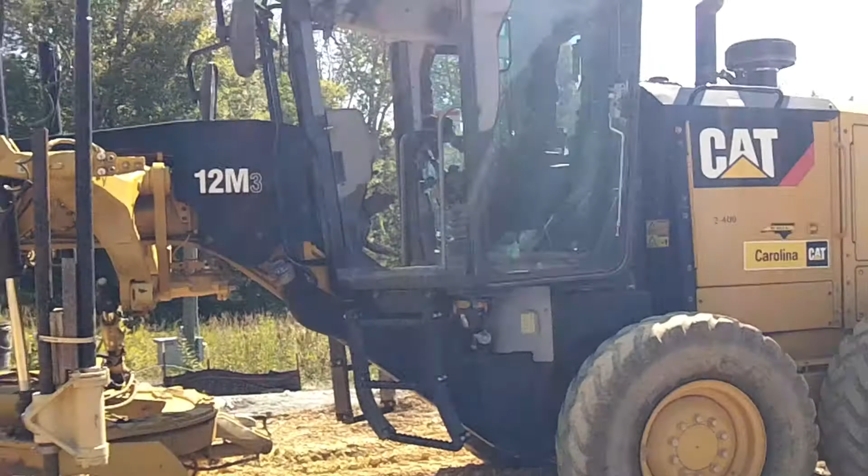Alright, so basically with the road grader, it's pretty simple. It's just like an MC square system on a dozer, which we're going to get that dozer up and running as well. But anyway, you want to get the pole pretty much straight up and down, best you can.

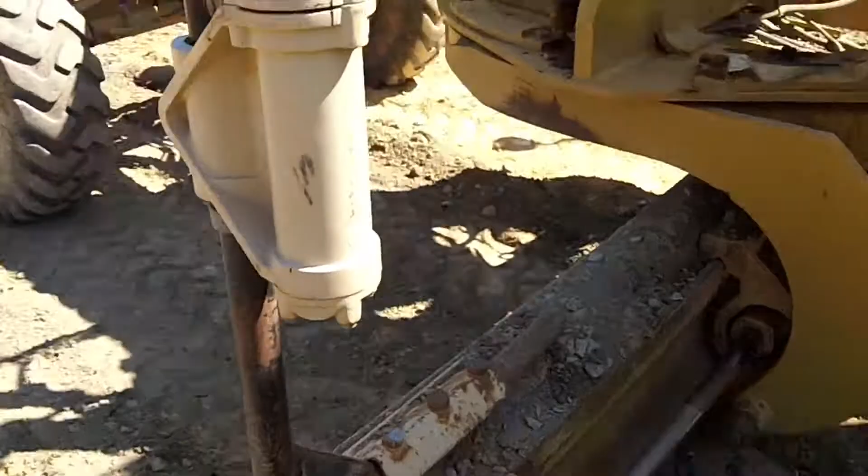And this is where you're going to be telling the sensor where zero is for that pole, basically. So if you go this way, you've got the corner of the blade, whether you're using the right or the left. How far over or inside is this sensor coming down? And where does that sensor land when it comes straight down? So how far over is the sensor? How far back, how far behind is the sensor?

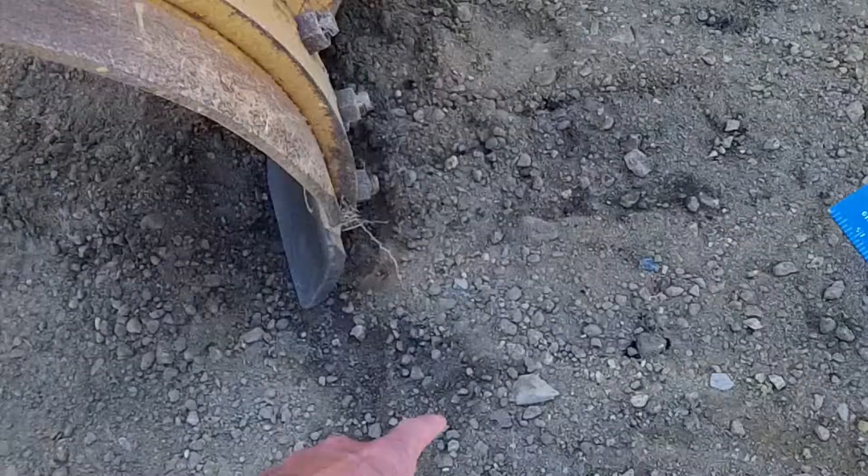Once you find that magic spot of where that sensor is, you need those two measurements: the width of the blade and the height of the antenna. How high is it down to the corner of the blade? That's it, those measurements right there. And then you calibrate the system and you run with it.

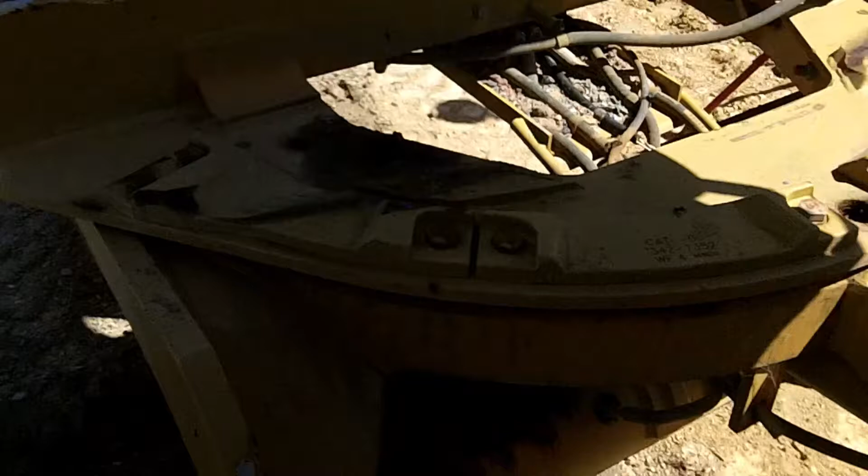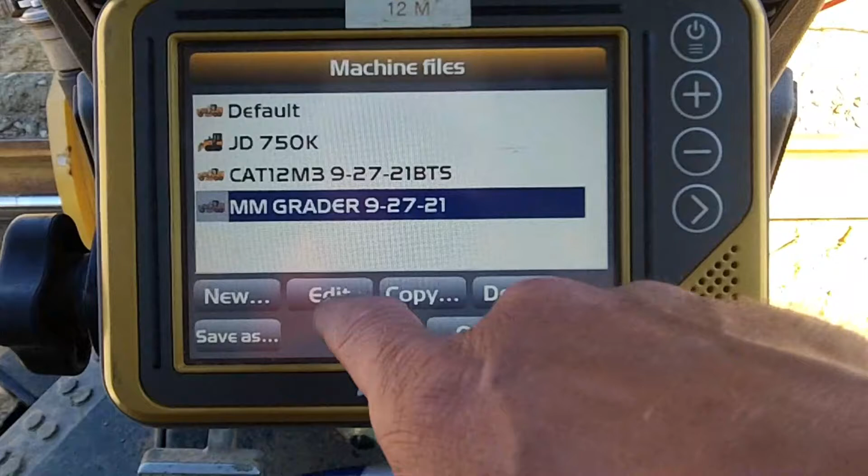So it seems like he's got a slope sensor calibration issue. It just needs to be calibrated. So, because right now, this essentially is zero for the antenna. Once that antenna is straight up and down, in pretty much every position in reference to the blade, that sensor should know that that's zero. And it's not knowing that right now. So we're gonna have to just edit this one.

What did I say this was? 12M3.

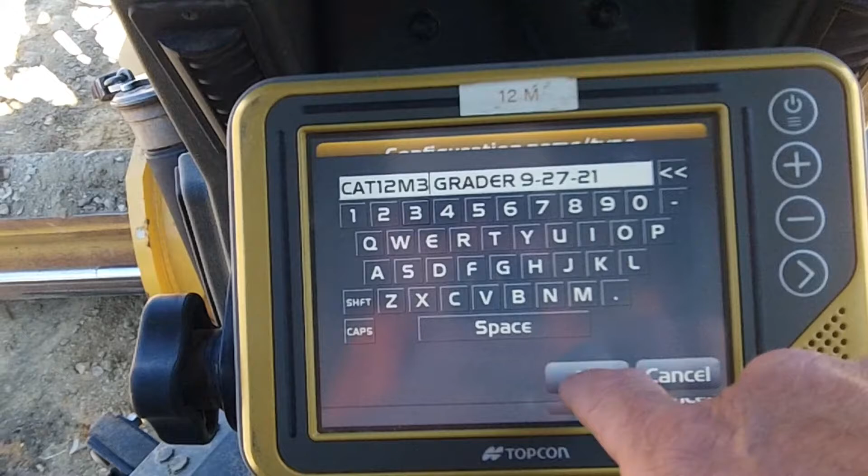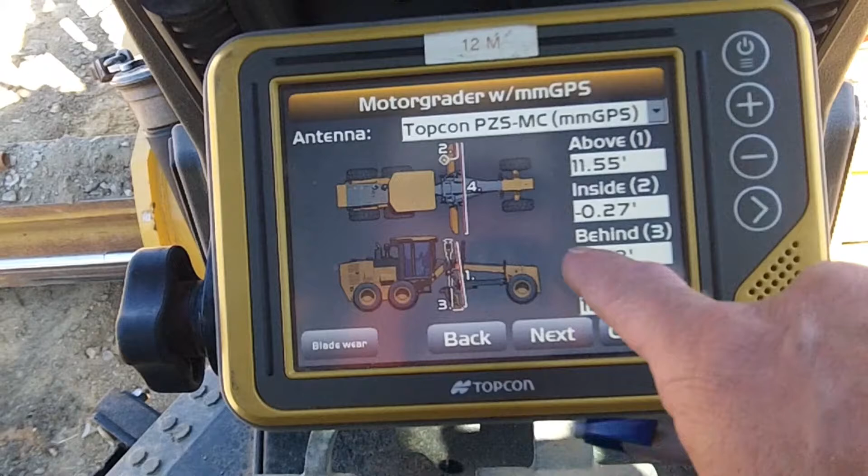Alright, next, let's see if it lets me change these numbers and hold it. Number 3, 0.68. That's what was causing the east and north to be out. 11.99.

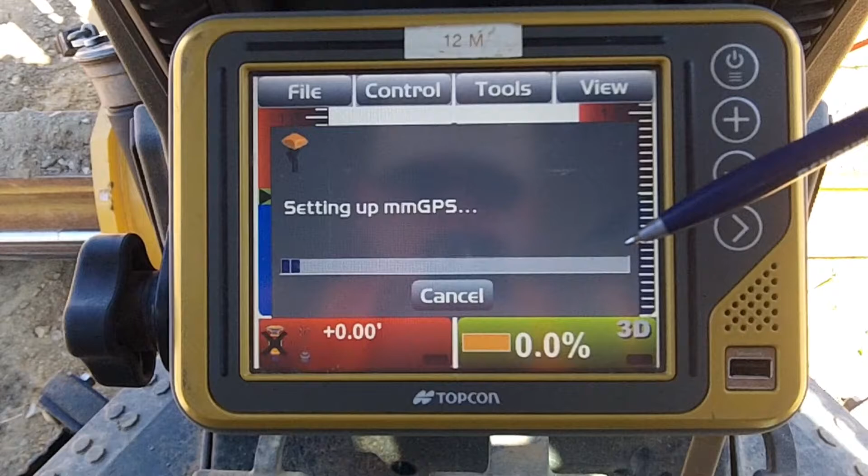We'll run that one and see if it... Alright, it's going to allow changes. Why wouldn't it allow a new file? That is so interesting.

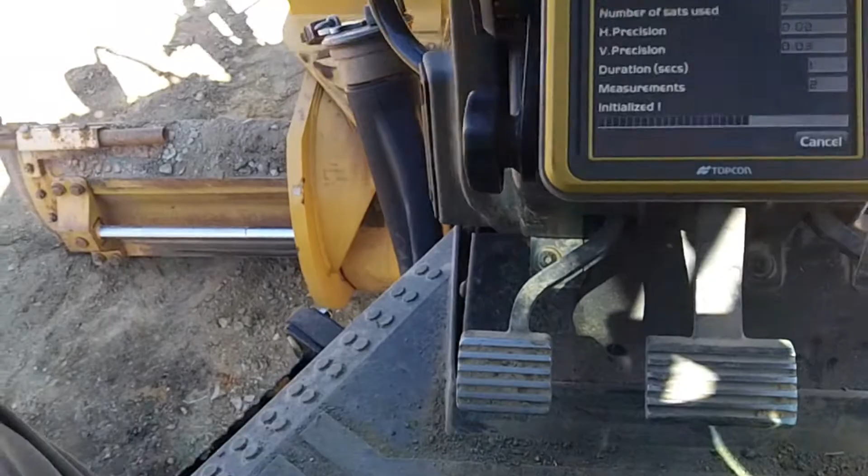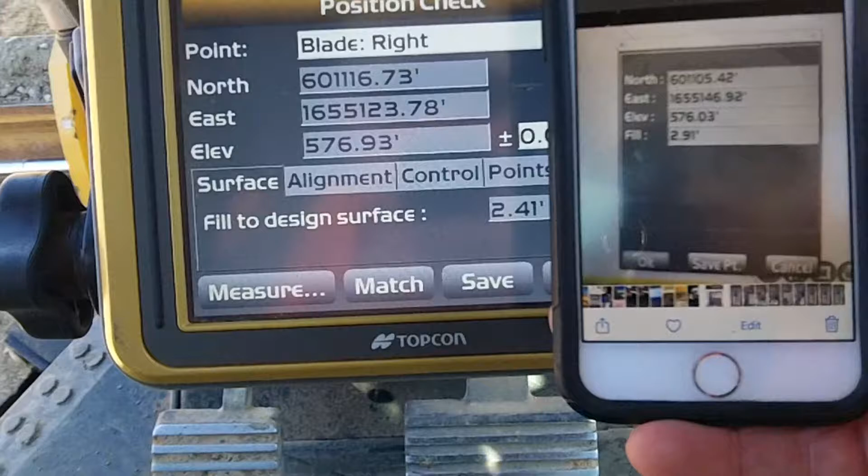Alright, let's take a shot of that right corner over there with the new measurements and see what it says, 'cause I have saved the shot we took. Yeah, even with the new measurements, it's still off. Let's see. Yeah, it's still off.

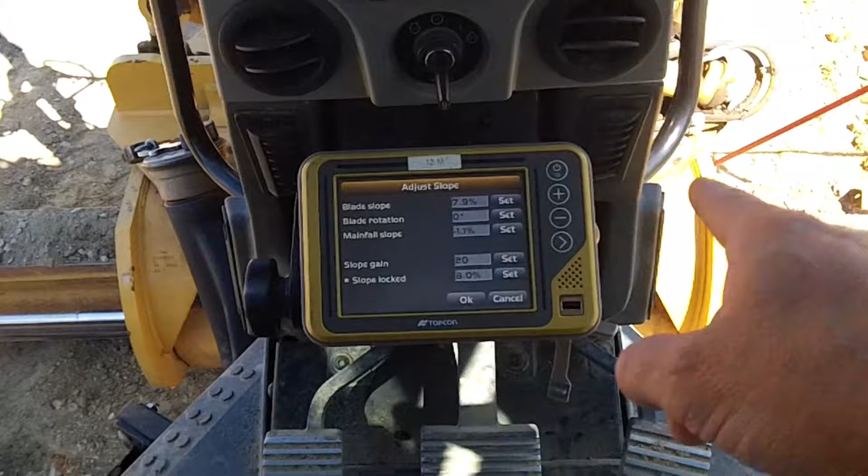So that tells me we have a sensor that's off. So we'll go into the sensors. The blade slope is reading 8%. No way is that 8.0%.

So what we need to do now is we'll take and level that blade. We'll put the level on it and we'll set that to 0. Blade rotation is at 0. Close. Mainfall slope is -1.1. We'll have to measure that. That seems about right, that seems normal.

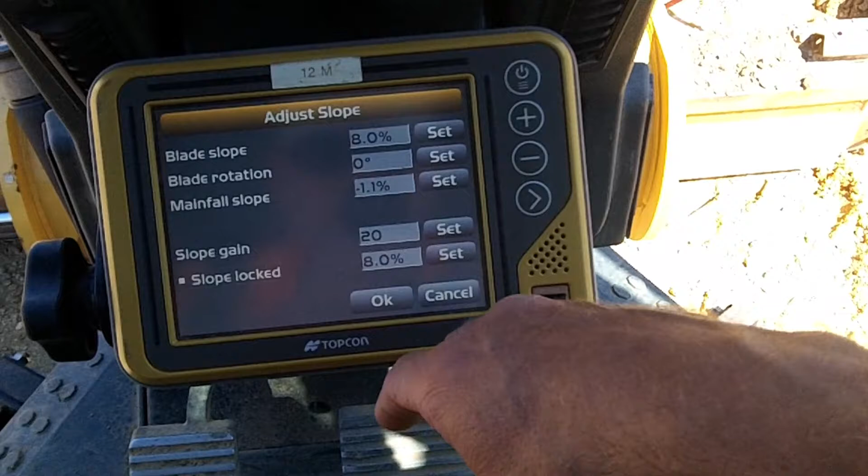But 8%, that's way off. That's basically telling you, that's what's giving you your elevation error, because it thinks that blade is somewhere else when it's actually more almost straight. So we'll straighten that up and we'll reset it.

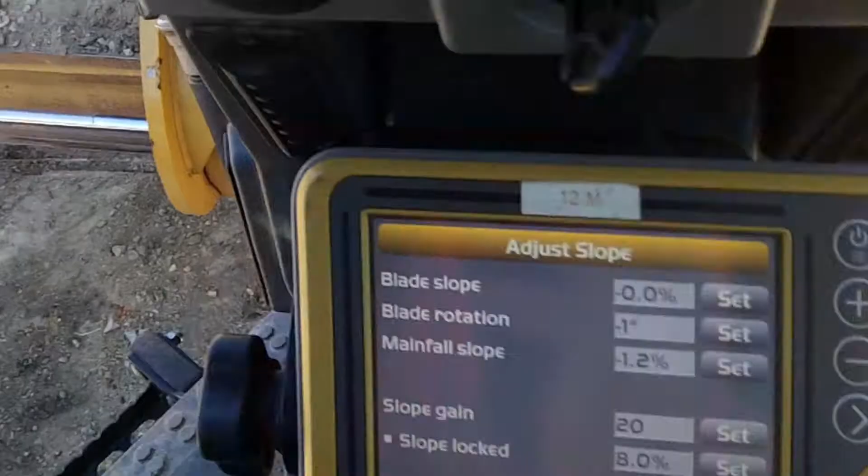Alright, so I just started the machine and basically put the blade at 0 according to these readings. I will jump out, throw the level on it, and actually see. It's probably going to read, what do you say, 8%?

Nope, it's 4.4%. So even that's off. 0 is like down here. So, yeah.

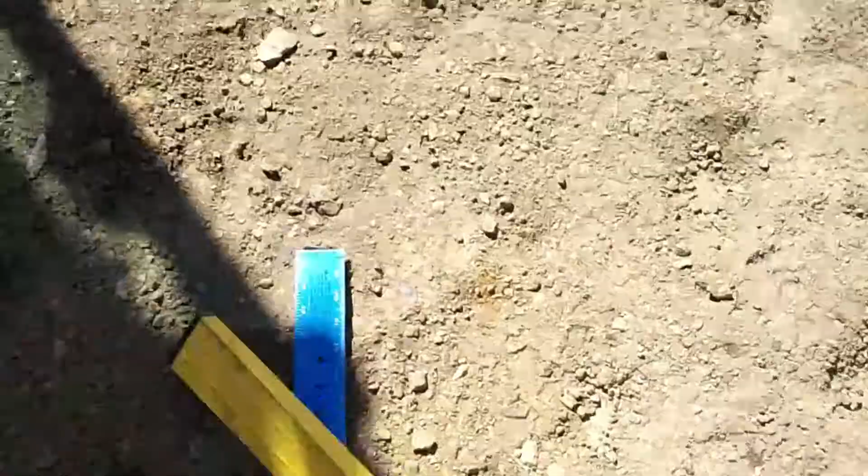So what I'll do is I'll just set that blade with the level at 0, and I'll reset that value for 0.0. The blade is at 0. And the sensor thinks it's at 7.1%. Change that to 0.0 and set.

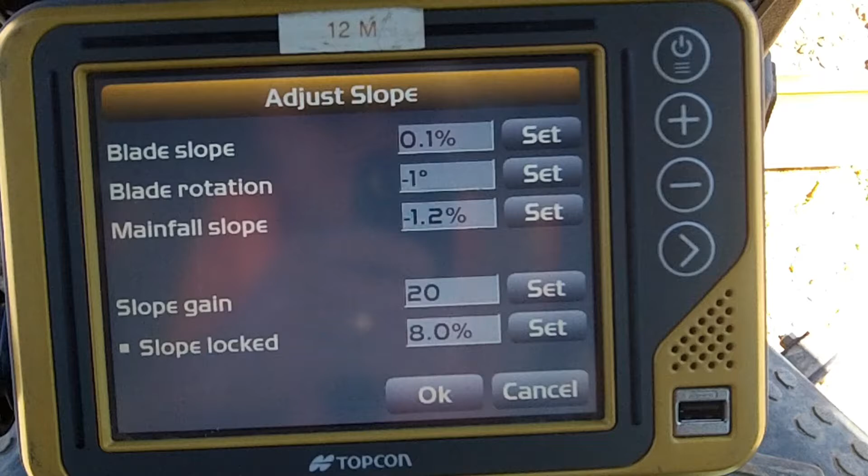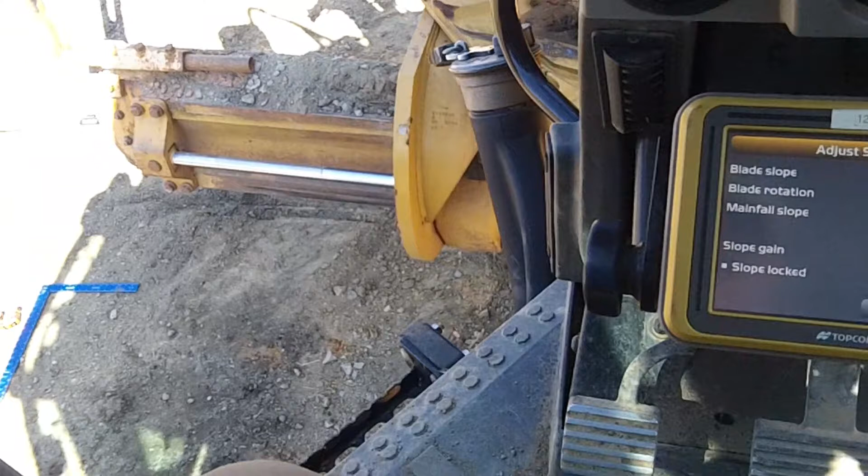And it should hold. So now, wherever I put this blade, I should be able to take my measure out there and read that, and it should say 5.9, negative 5.9. Put it back to 0 and check it.

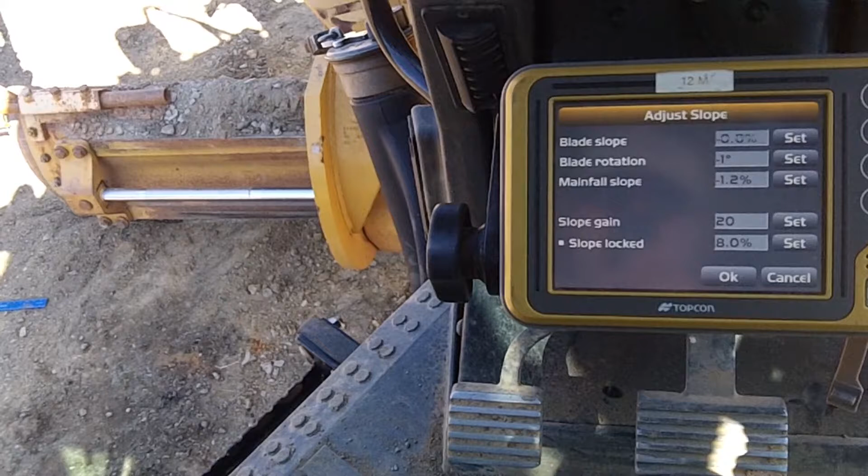That's touchy. Touchy. I guess it's nice to have a touchy grader.

Alright, so I moved it just to kind of throw that sensor, and now I put it back to 0, and we'll just check it with the level, make sure it's at 0. If it's not, you just do the same thing over again.

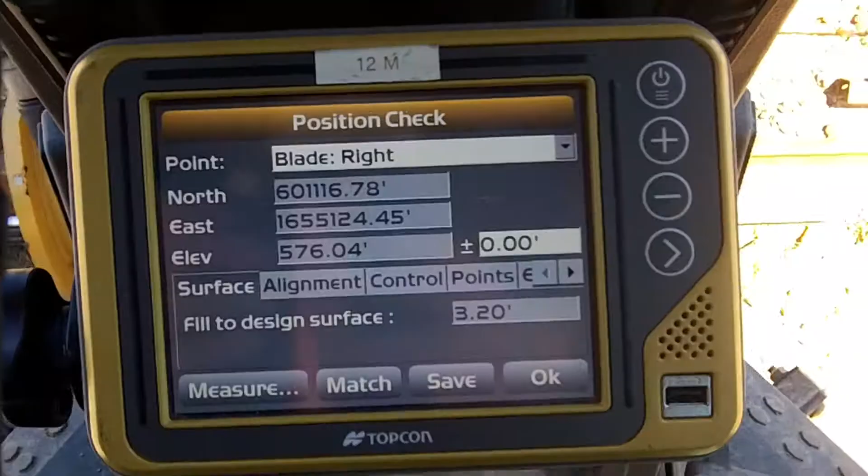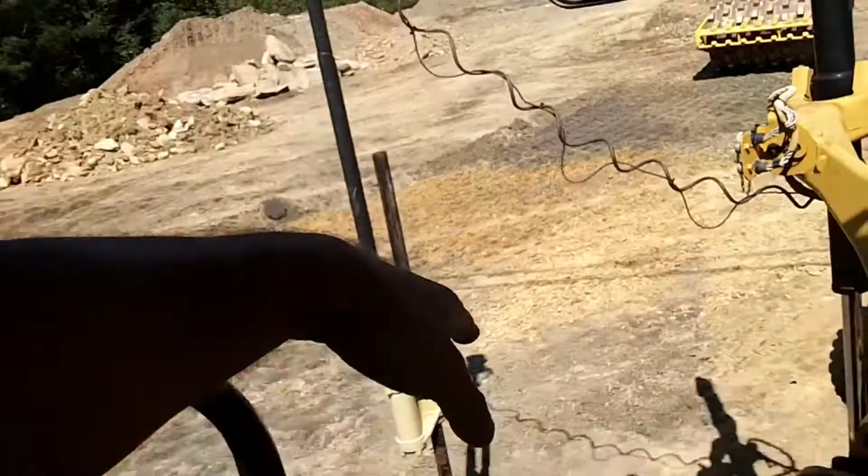So now we check the right side of the blade with the measurements that we took, and that ground right there is 576.03. As you can see, I'm 576.04. So we made up that 9/10 difference. We're now 1/100ths off. That 9/10 difference, basically with the blade thinking it's this way, it was like 8% off, up or down, showing that antenna was actually higher, 9/10, than what it actually was, because it thought the blade was tilted. Alright, so didn't take much to fix this one.

Basically, we can go into tools, position check, that left side. I already took a shot of it. We're good.

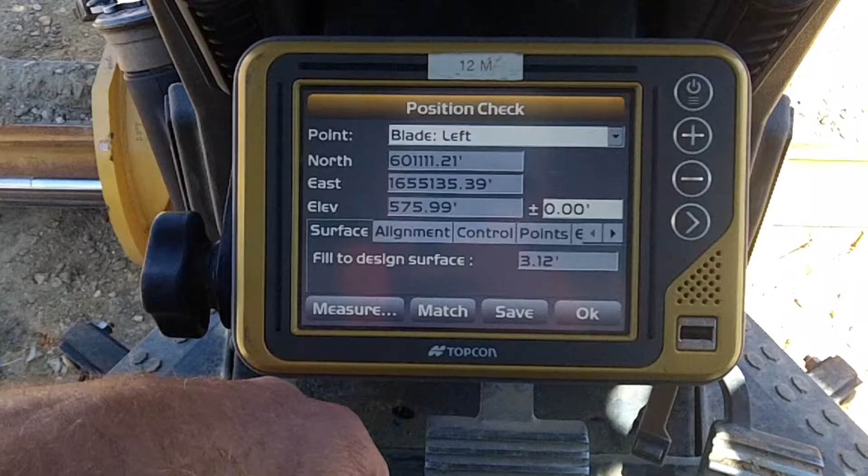And we're at 9.7, so it's a difference of 200ths. Somehow these numbers got played with, which is easy to do. People start playing with them thinking they can get it set, and no, leave it alone.

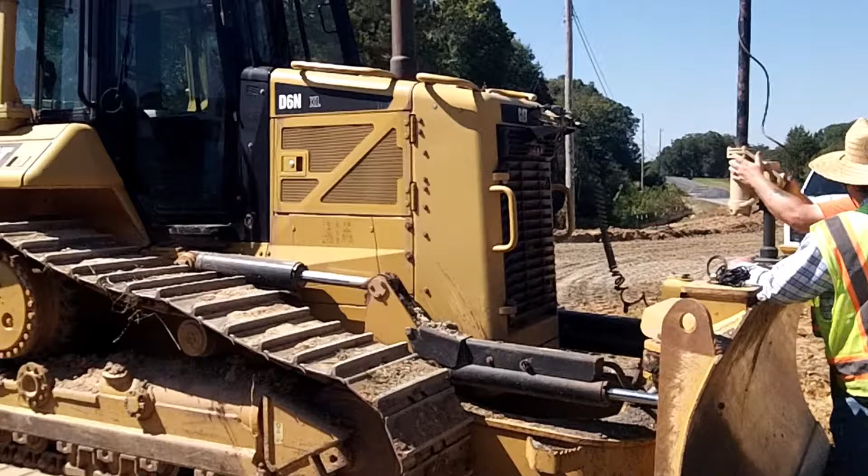Alright, we got a Cat D6N with the MC2 system going on right now. We're just going to get that one up and running for them, drop the new project in the system, check it, make sure it's cutting to the model, make sure everything's working, measurements are good, and they can cut with it. Yeah, so we'll start working on that one now.

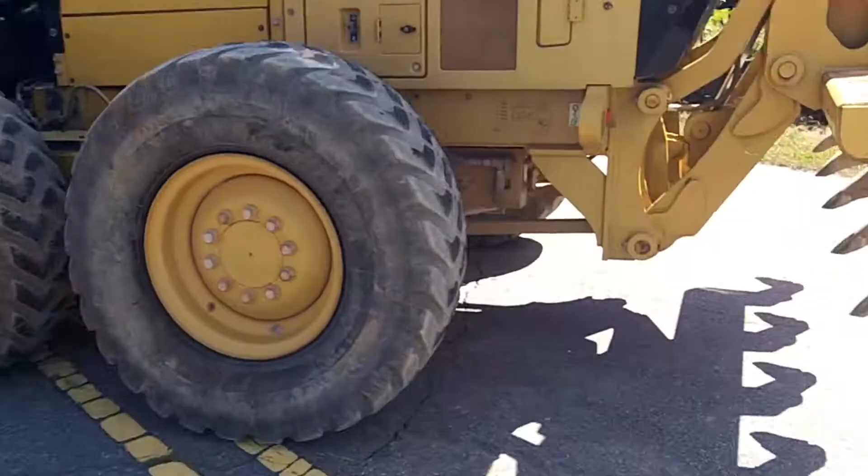Yeah, just going to go ahead and do a full calibration on this machine. Still reading a little funny. So as far as calibrating the sensor for a road grader, it's really simple. You basically set the grader in a position where the blade is completely square to the machine.

It should match the machine exactly, it should be a 90-degree. You hit next, it's going to record that position of the blade, and it's going to go to a next page where it says mark the ground where each corner of the blade was sitting. You're going to set that blade right back on those corners, basically telling the machine, yeah, that's correct.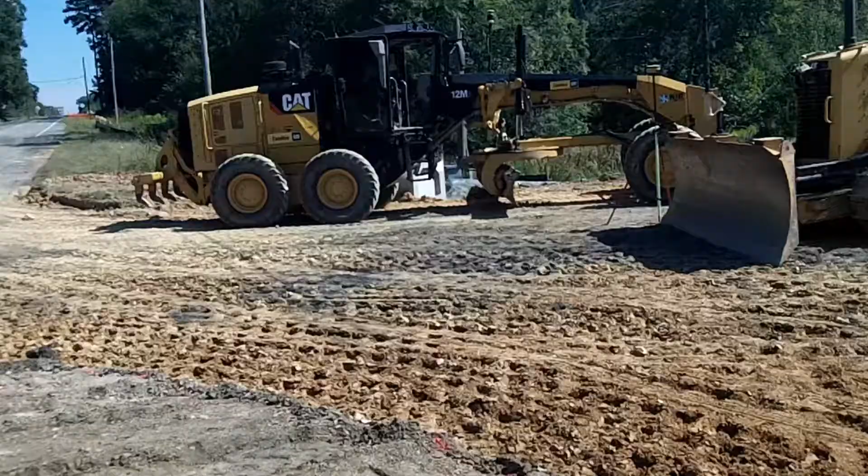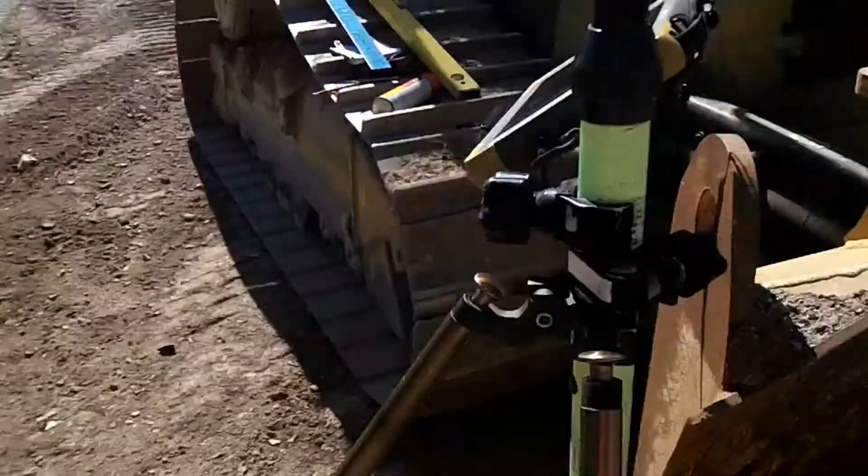Okay, so what the discrepancy was between the rover, the model, and the machine was basically the rover pole. So from the base point down here, measured all the way up to right around here where that lip is, 6.77, but 6.56 was in the system, so that's a difference of 0.2 between the two, and we calculated that. We fixed all that. Now, with this machine...

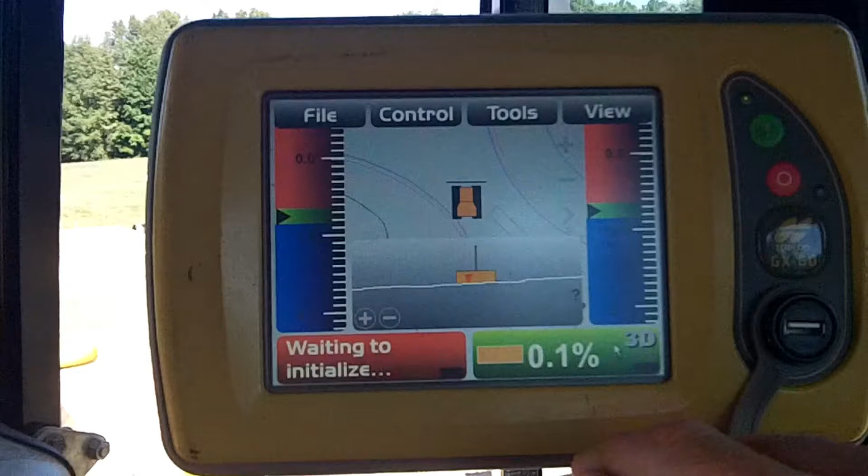We got an old version of 3DMC, a 2013 version. We're on 4.8 right now, firmware for the GPS, so that's old. This is a GX60. I'm hoping not to crash it. So we're about ready to find out if it's going to crash or not.

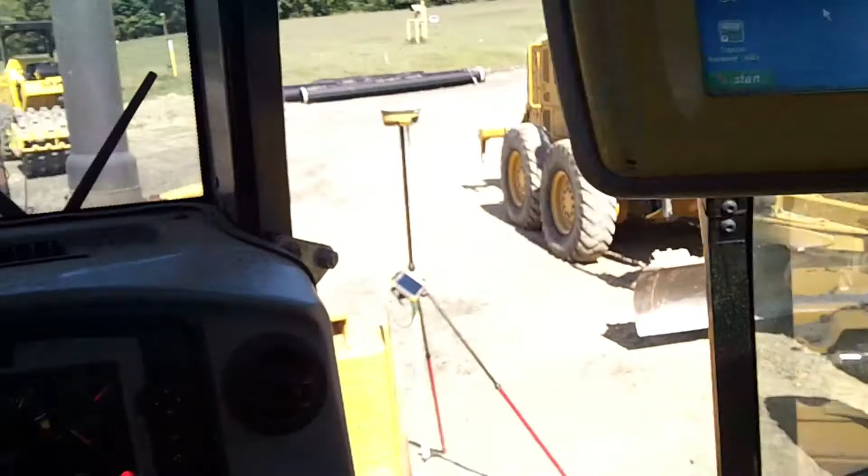So exit, and flash drive. I got the new firmware on there. So the first thing we're going to do, if I can find my... first thing we're going to do is go to my computer, we're going to find my flash drive.

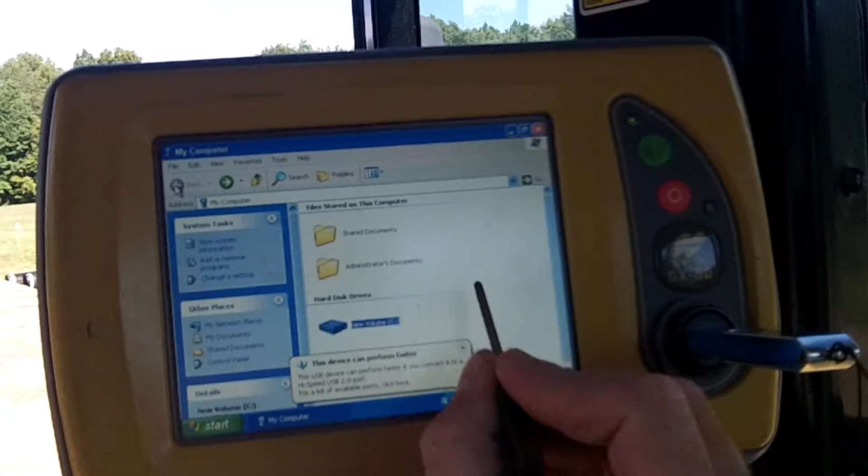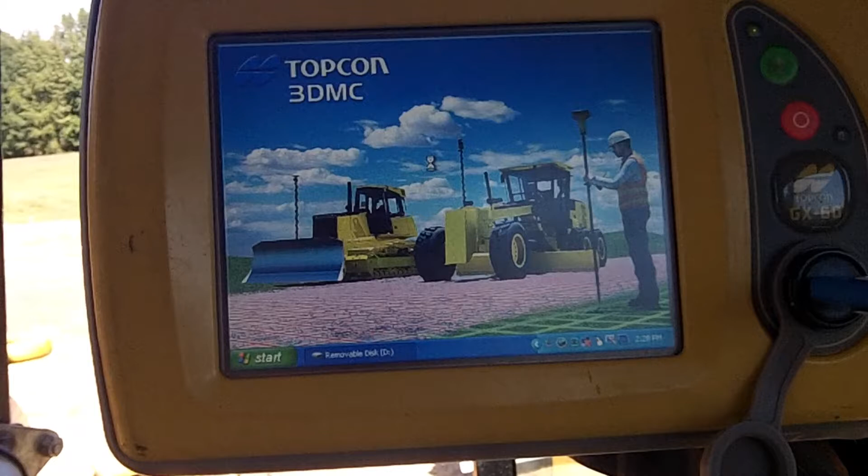In there somewhere. What is this popping up there? Get out of there. Come on. Removable disc, there it is. 3DMC 12.2 535. Double tap that, it should start automatically and load this new 3DMC software. If it doesn't... there it goes. Alright, awesome.

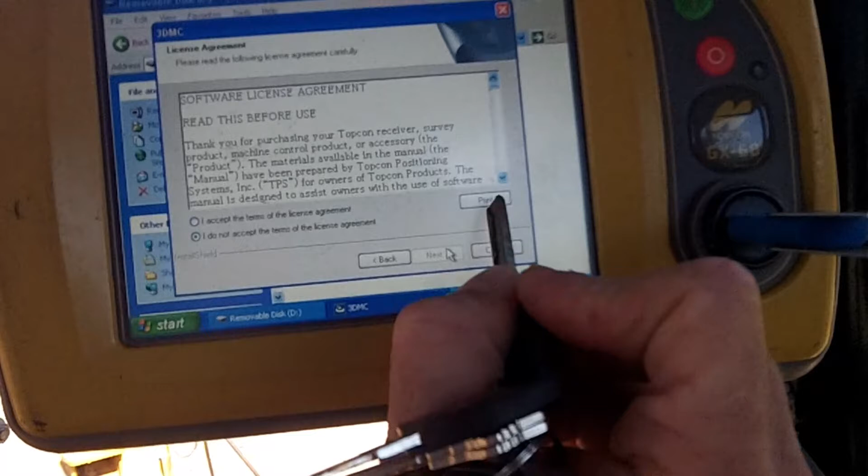And next, we got to calibrate their screen too. I accept the terms, sure. Sure, why not? Alright, so now let's get out. Oh, we gotta calibrate this.

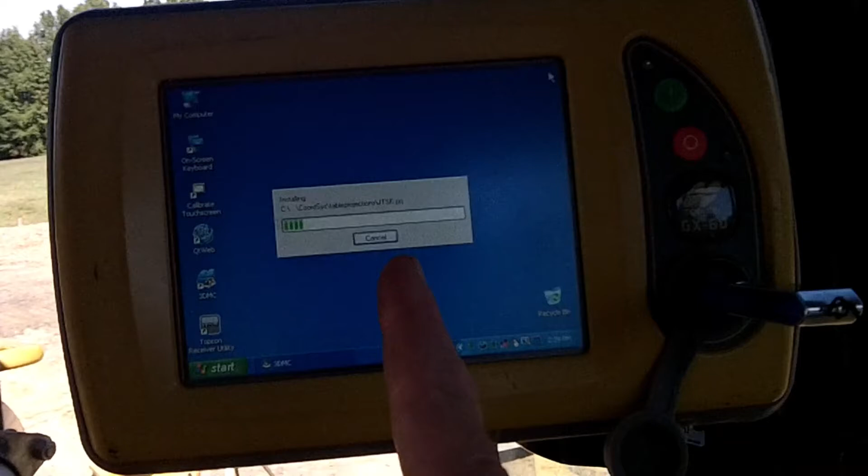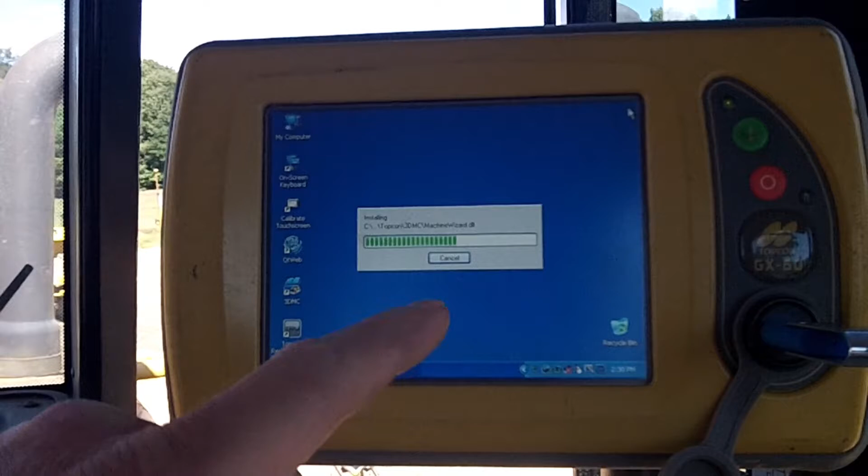It's loading. Once the new 3DMC software loads and updates the 3DMC program, we'll go into TRU and load the firmware for the GPS antenna. Right now it's reading, but it's not doing so well. 2013 firmware, you could probably tell, it won't do well. It's like trying to load the most current software today onto something like a Windows 7 on a Commodore 64. It takes a while, and maybe it accepts it, maybe it doesn't.

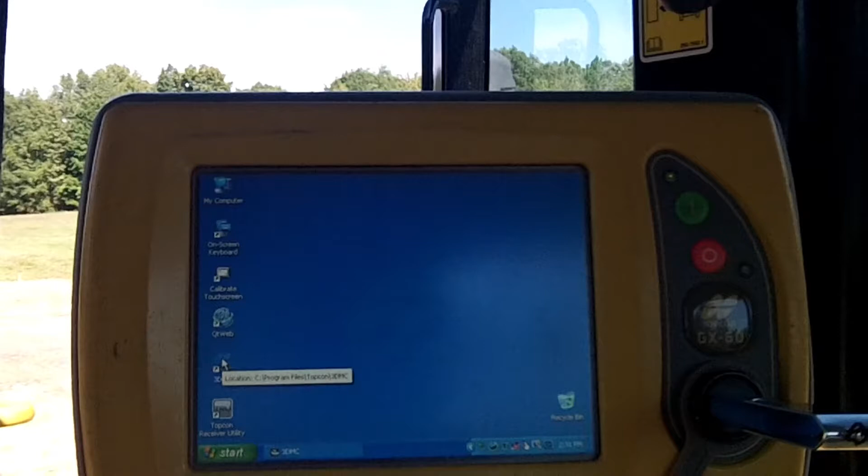We'll find out, moment of truth. We'll go in, open up 3DMC. Oh, there it is, there it is. Oh yeah, you can tell, that's the new one right there. About, yep, there it is.

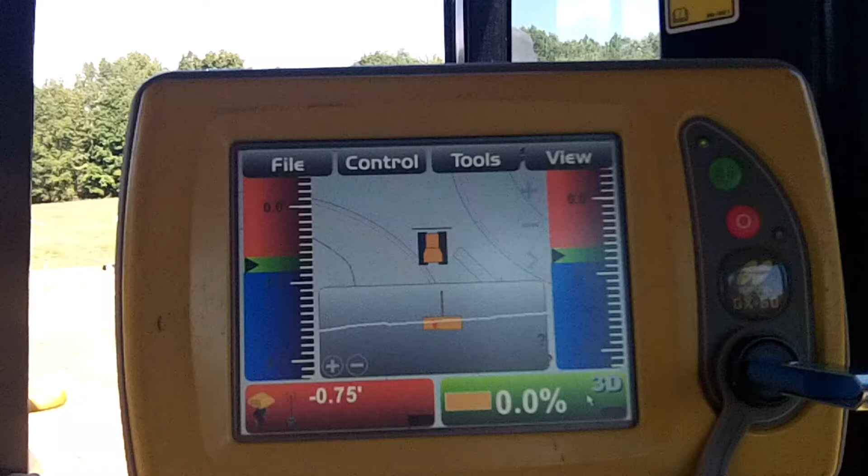12.2.535, 2021, and it took it. I couldn't believe that, that's awesome. GX60 running that software, oh that's good. All right, so now I'm gonna have to calibrate this screen, so I need a pen, something fine point, and mine blew up, so I gotta go get another one.

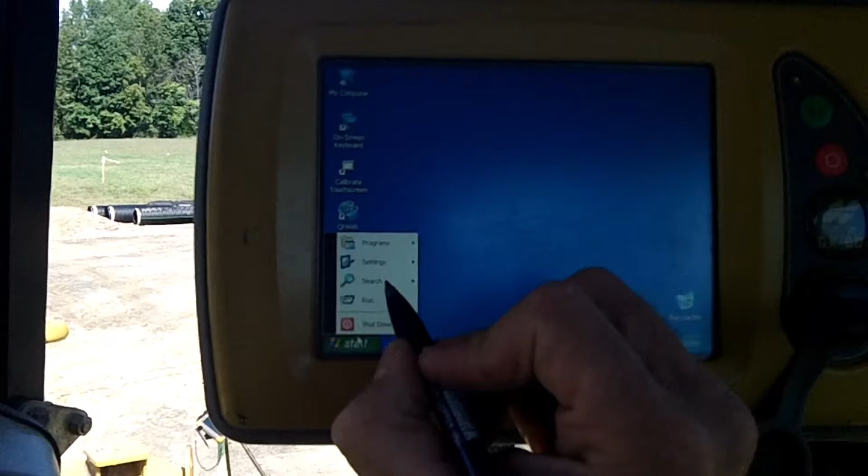All right, so this screen needs to be calibrated. Do you see where that arrow's actually pointing? It's like up that way from the point. So let's go to settings, control panel. Oh, forget it, sometimes these old GX60s have them right on the screen, and there it is. Double tap the calibrate button.

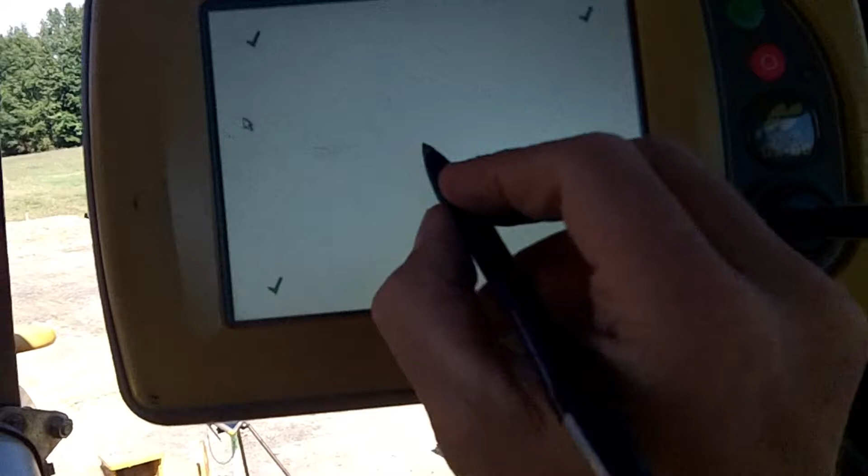Hello? There we go. Touch the little crosshairs. Give it a tap, and now where you touched... oh, that's much better, much better.

All right, so now we're going to TRU. We're going to expand this, go into device, application mode, firmware loading, device, connect. We're going to connect to the main, yes, because it's the only antenna on here, and it's going to be the main. Go in the receiver. Should only be one file.

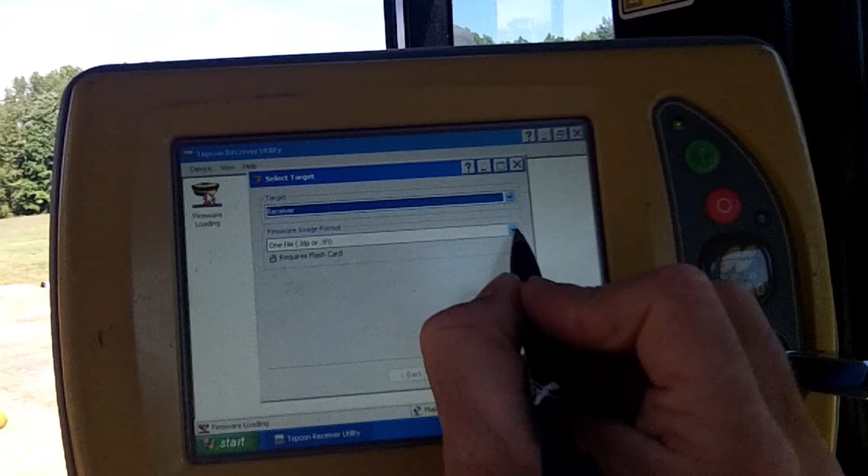Okay, next. It's going to connect to that receiver, and it's going to bring us to this screen where it says firmware version 4.1. Woo! Next, this is just the packet size. Next, firmware flash, go in and find it. Get to your storage device, removable disk.

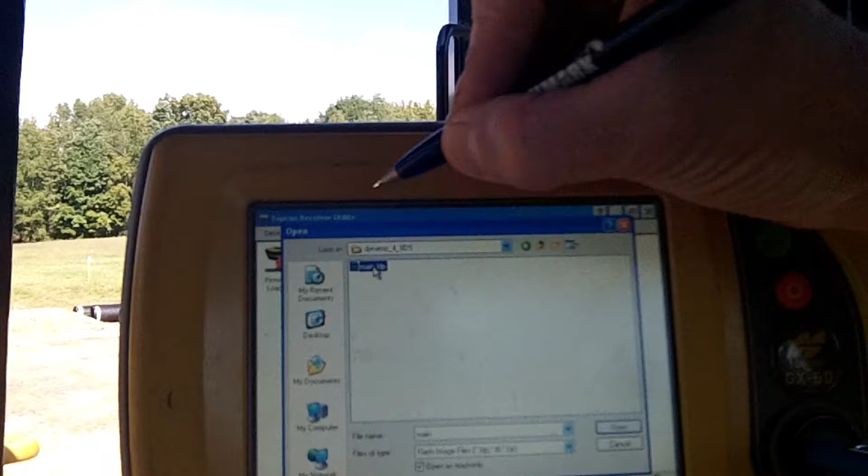That's it right there, the main. Open it, there it is. Next, it's loading.

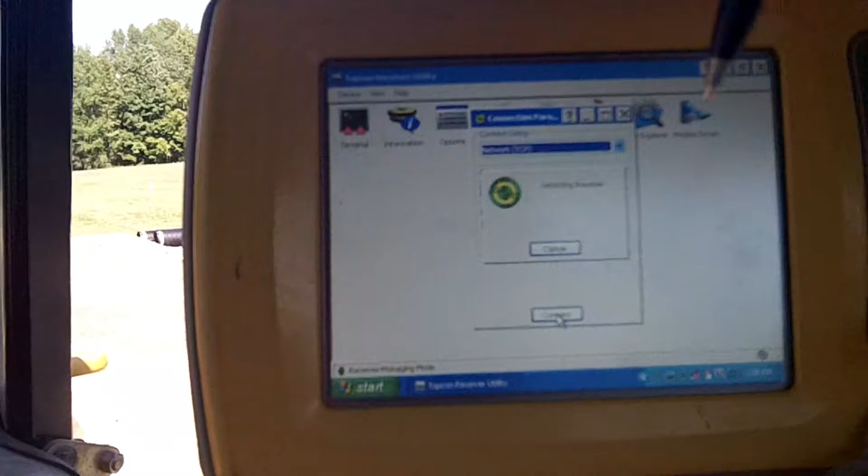Firmware loaded, hit OK. We don't want to connect again. Actually, yes we do, but we want to go into application, receiver managing, device, connect back to the main. We want to do a factory reset on the main receiver so that it clears out all the old settings. Go back, tools, factory reset, yes.

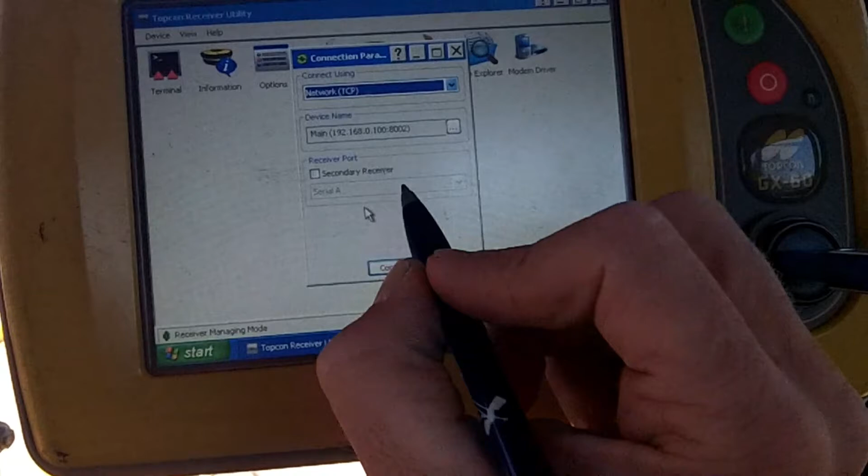We've already connected, we don't need to connect anymore. It already reset. Now we'll go into 3DMC and check for that update.

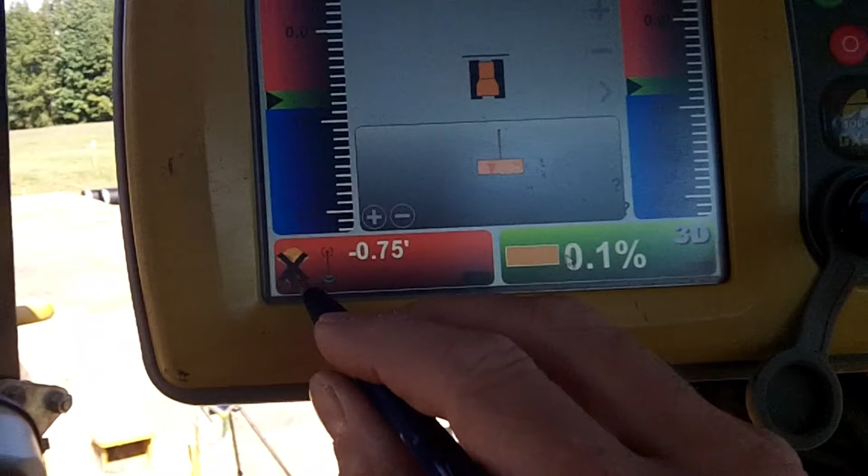Go into GPS, info. There's the update, firmware 4.8 D5. Beautiful. No distance to base yet, so we got to X over GPS, waiting for satellites. We want to check our radio settings here.

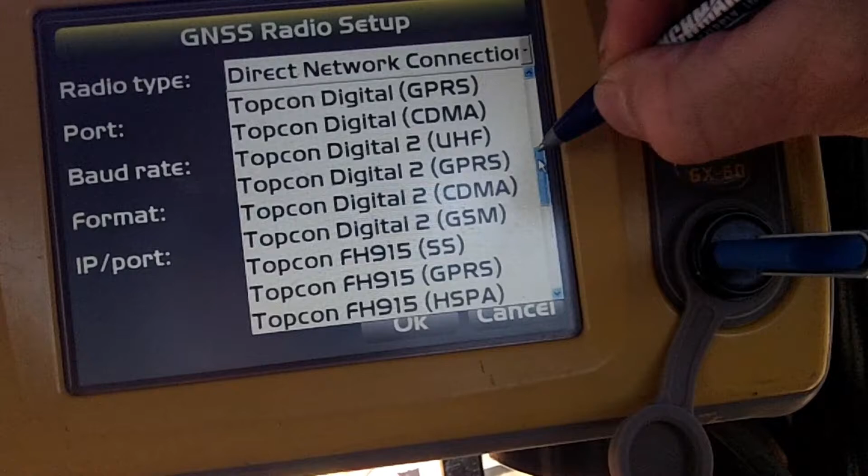They're still on direct network. That's not true, so we'll have to get the radio information so we can connect. Alright, so what we're actually using is Topcon Digital 2 UHF. Serial port B, and we're on 38400. Yep, and configure, make sure it's the same radio frequency.

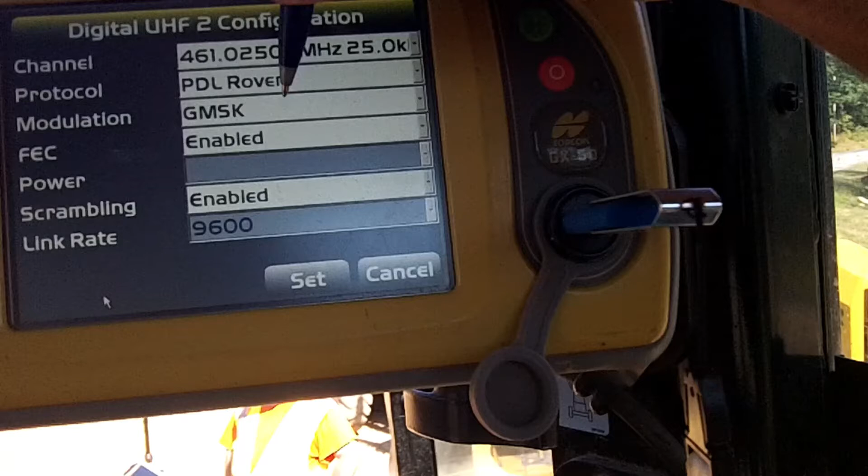We're running 461.025 at 25. It is a PDL rover. It is GMSK enabled, 9600, and set, and we should go green and start tracking satellites.

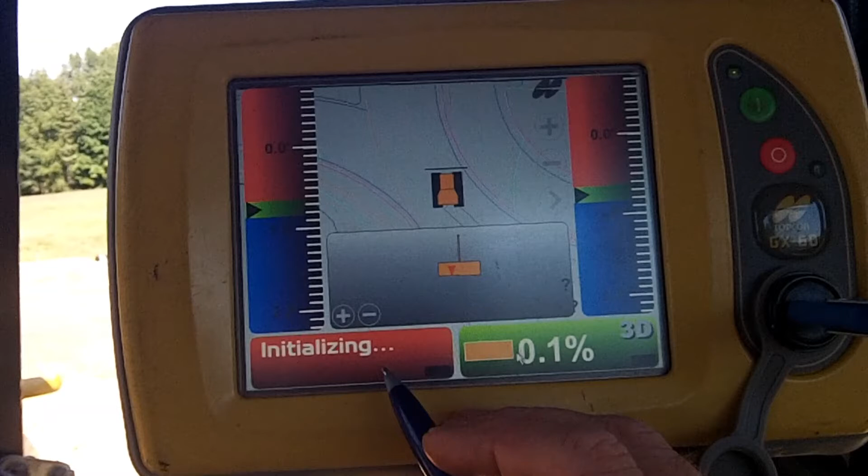And that was a good sound. Initializing. Green, awesome. Now we just need to check our elevations and make sure we match.

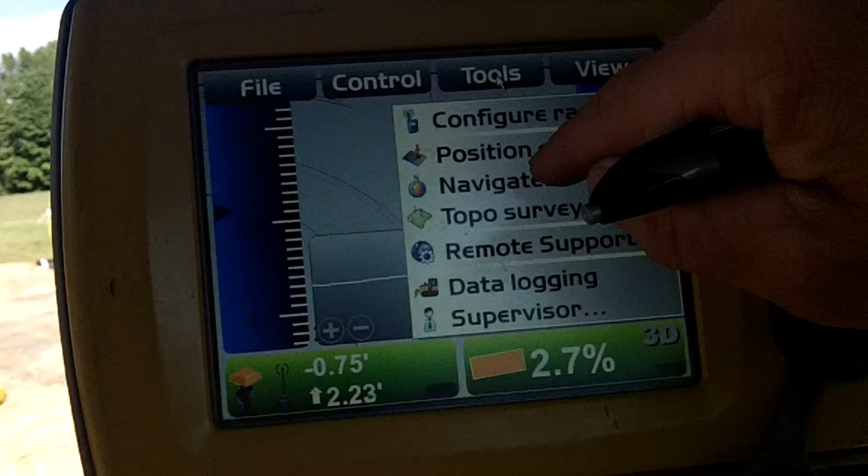Let's just do a right blade check, because that's where we actually did the position check on the right blade. Measure, and we'll check our values. 1110, 1117, that's 7 feet off on north. 128, 123, that's 5 feet off on east.

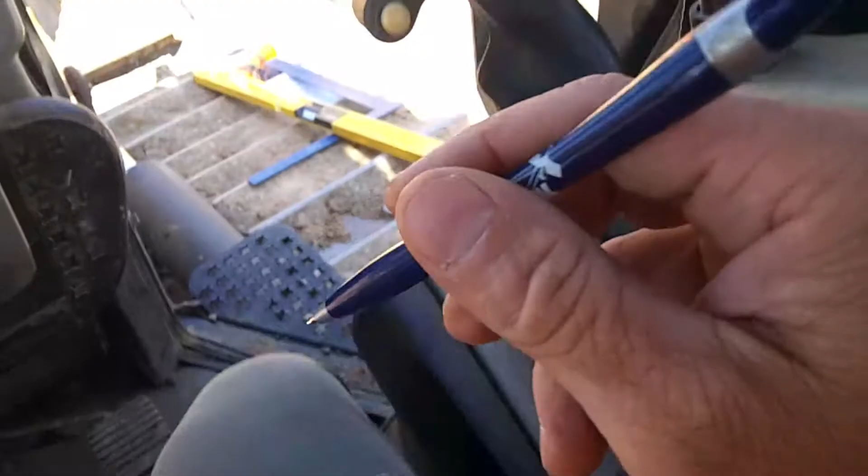575.90, 575.94. Wow, that is off considerably. We'll go in here and make sure it's on the right file. The last time this was updated was 2016, holy cow. Bulldozer w/GPS, middle of blade, yes it is.

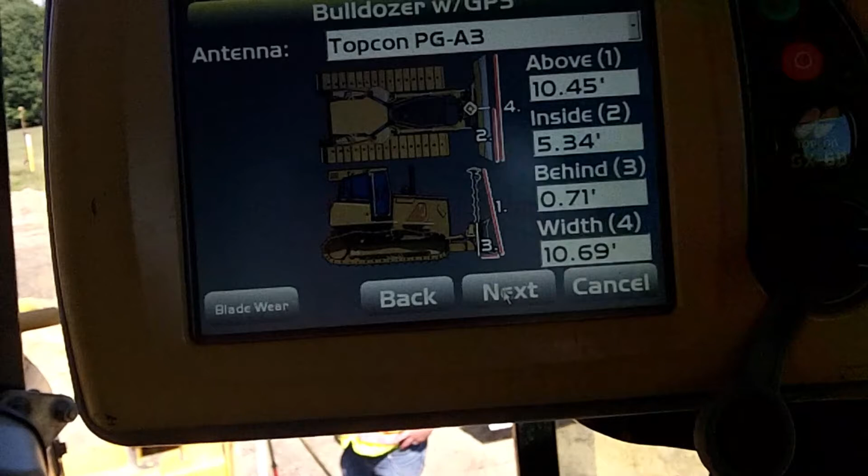Next. MCR3 standard, yes. Now we just have to check these measurements. There's only a few right there, that's it, that's all you got to deal with. One of these measurements, or two, or more, are throwing off that north and east.

Elevation is good, so we'll go out and remeasure them. Alright, let's see how messed up these numbers are. So number one, antenna height to blade, I got 10.43.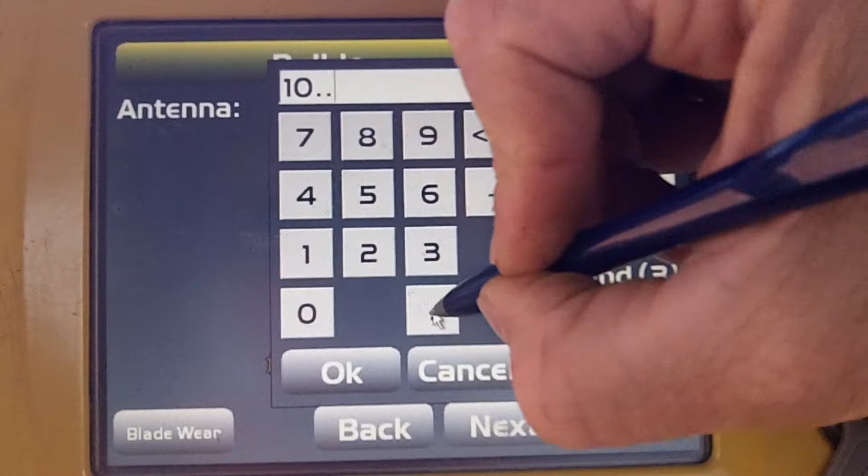That wasn't too bad. Number two is basically just half of that, because it's centered. And you just get your trusty calculator out, you touch 5,000 buttons, divided by 2, 5.215.

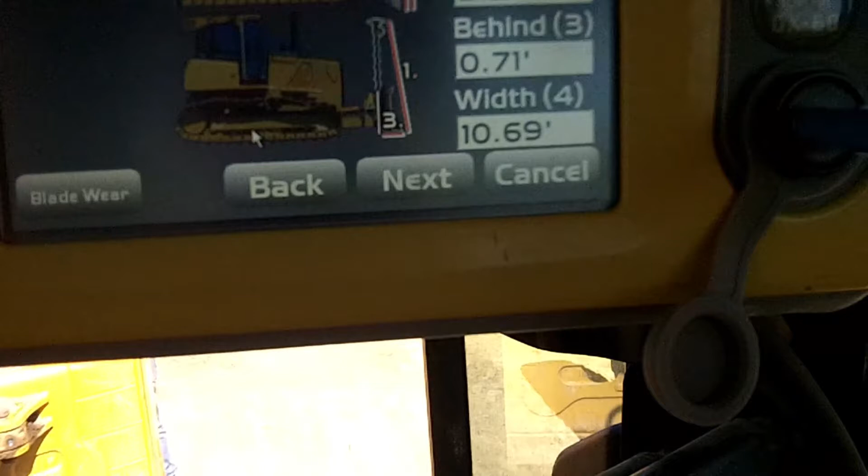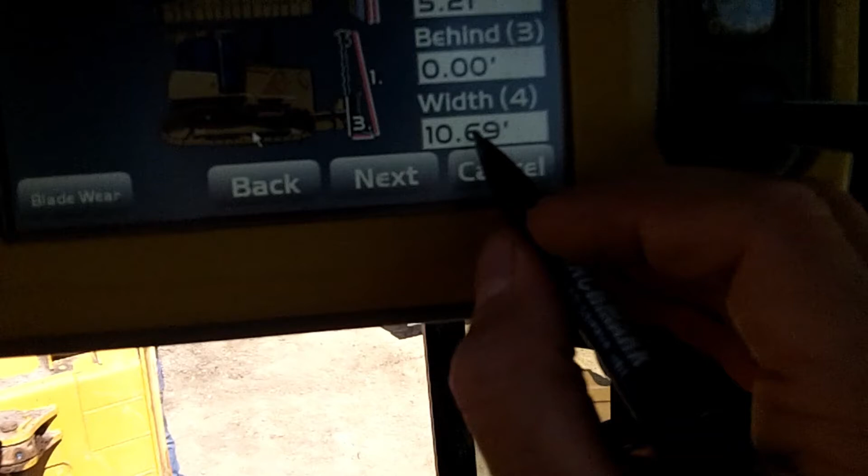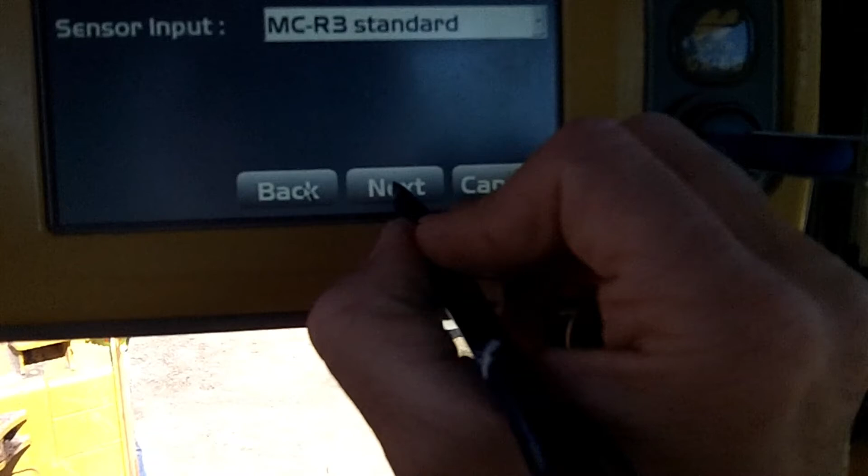Missing something. Where's the one for the sensor, the blade sensor? Interesting, it only has it for the GPS.

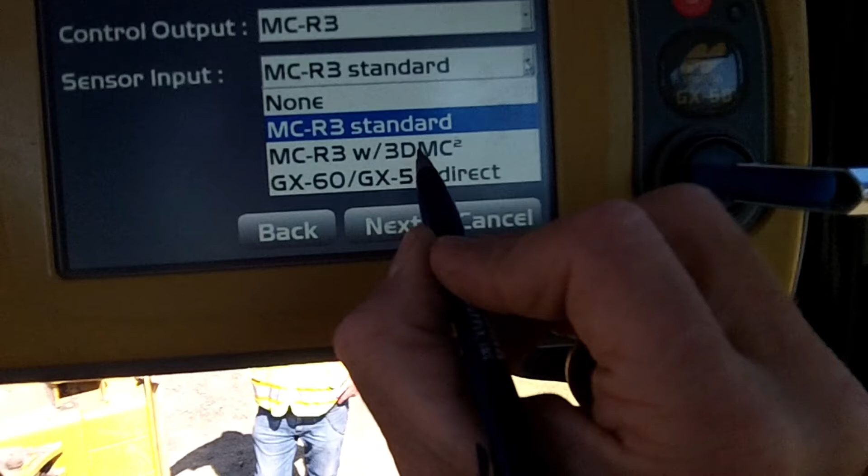No, I don't think so. It is an MC-R3. It's interesting, I don't see one for the sensor. That might be in the actual calibration.

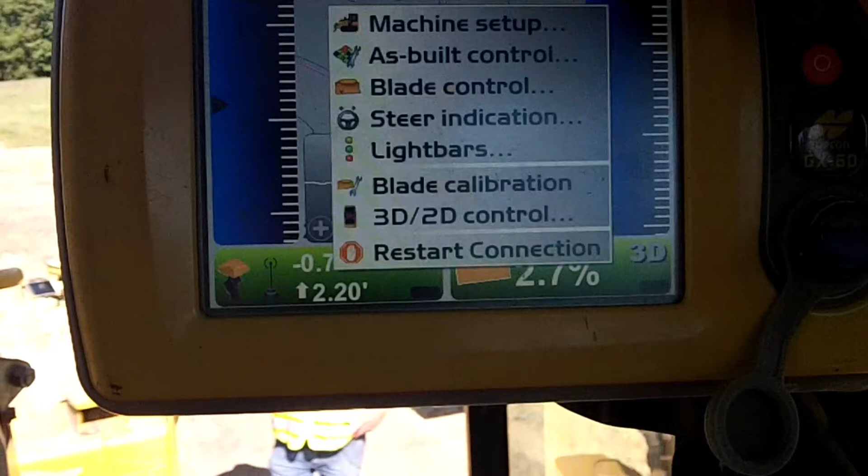Alright, so now let's do a position check and see if that helped out at all. Get back to my photo, touch 5,000 buttons here just to get to one screen.

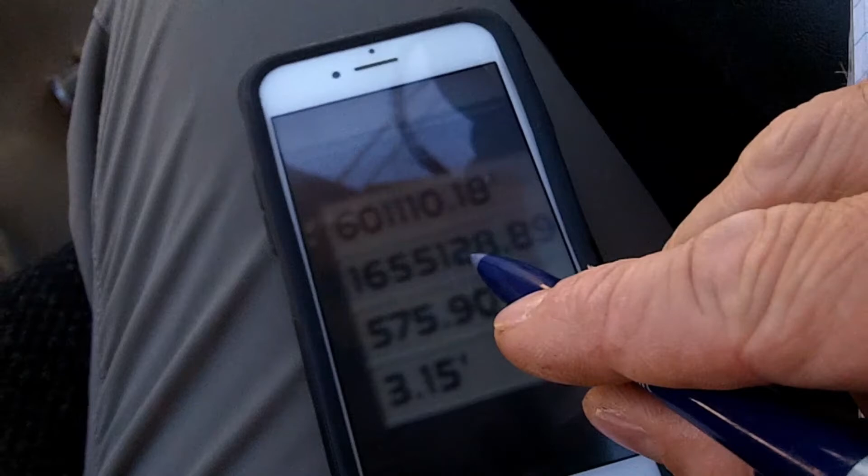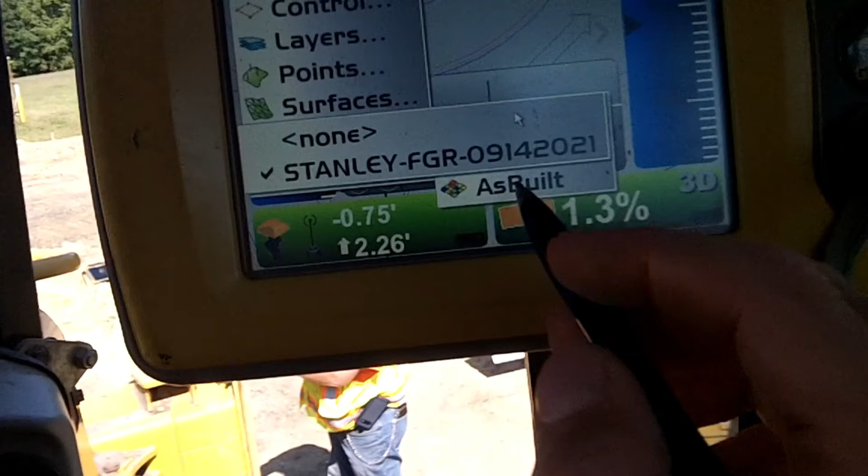Let's check the surface. It's on Stanley. That's interesting. Alright, let me figure this out.

Alright, there we go, much better on north and east. What you have to do is move the vehicle, it's a single GPS antenna, so you got to move the vehicle around. And that's it, it's good.

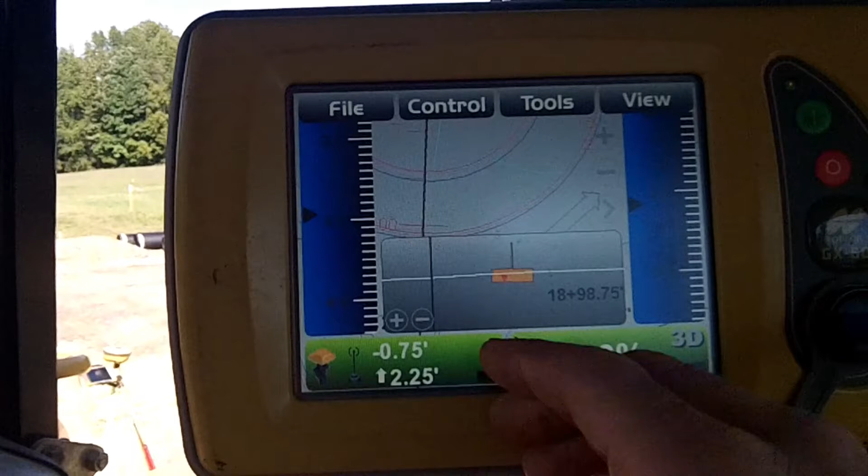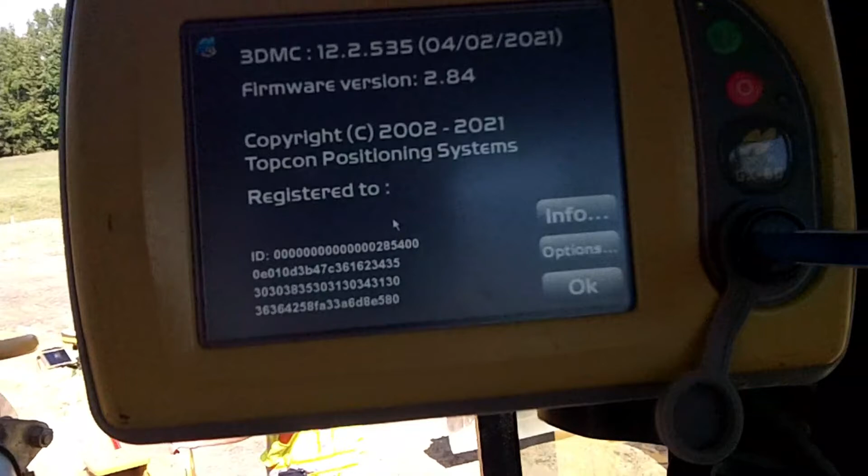It's good, it's ready to go to work. It's got updated firmware and everything. So just go in here, double check info, take a photo of it. View, about, take a photo. Nice, okay, so this dozer's ready to go to work.

Final thing, actually not the final thing, we gotta check valve offsets. Let's check the blade slope. So I put the blade at 0 according to the screen. Take the level and check.

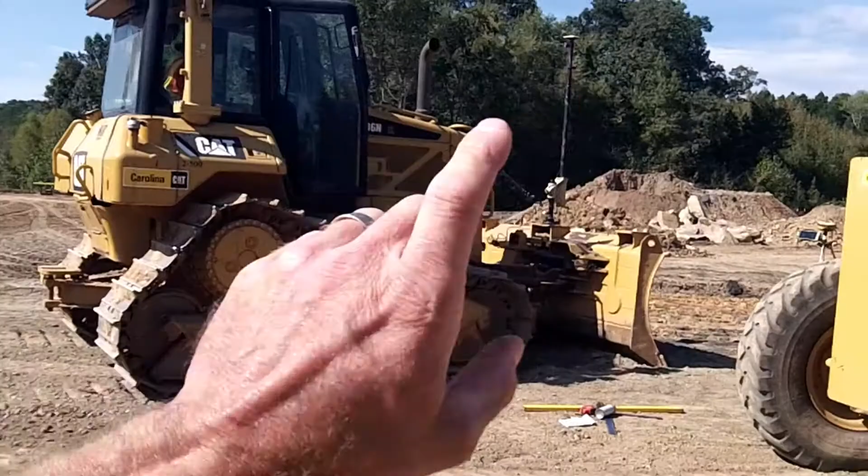Alright, so when I put that blade at 0, it was reading 2.8% off. So all you need to do is go in there and enter 0.0, and the blade sensor recalculates to 0.0. That machine's good, that machine's good.

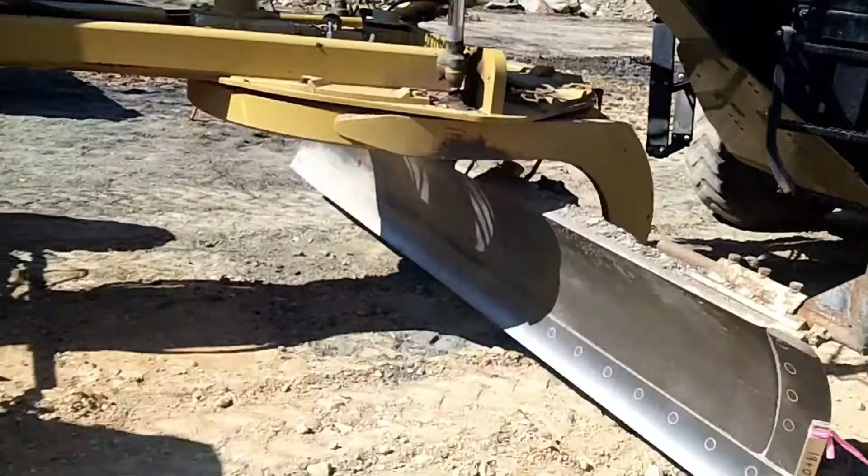And I don't like matching to grade stakes, there's a nail down there. I don't trust these, I'd trust the model over that, but that's what they wanted me to do so they can run their curb. So that's what I did. That one's done too. Thanks for watching.